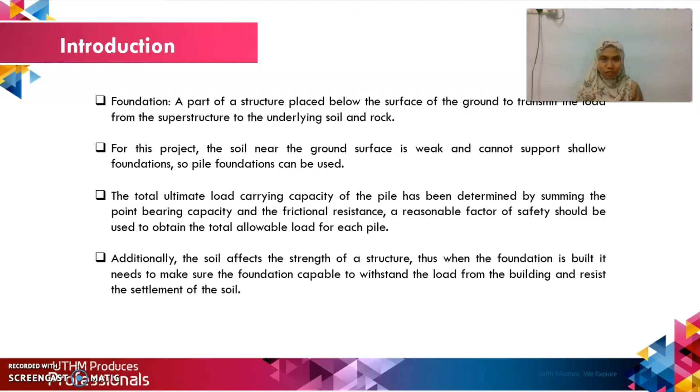In addition, the soil is influenced by the structural strength. So, you need to ensure the foundation is capable to withstand the load from the building and resist the settlement of the soil. Okay, next, let me introduce the company background.

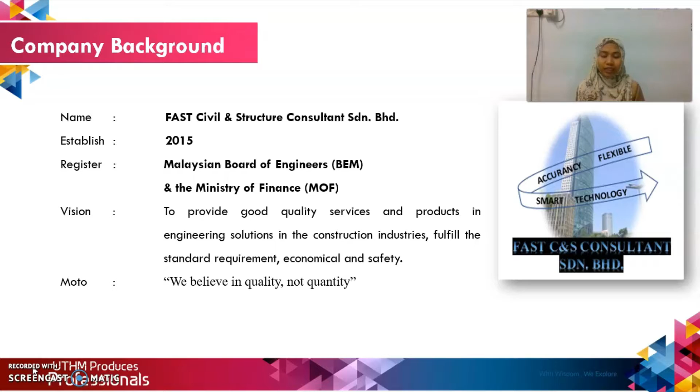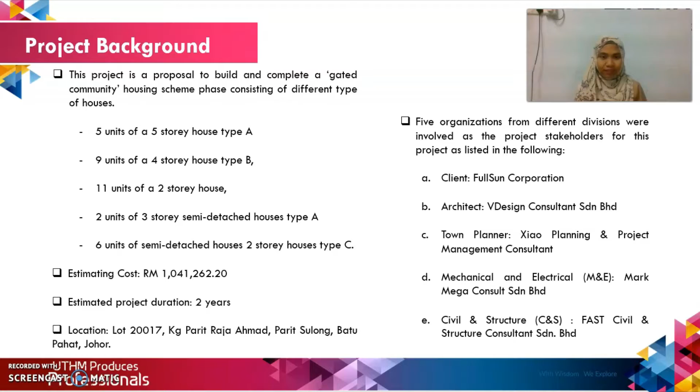This project is a proposal to complete and build a gated community with 5 different types of houses located at 20017 Kampung Parit Raja Ahmad, Parit Sulong, Batu Pahat, Johor, with a 2 year project duration and estimated cost of more than 1 million ringgit Malaysia, and 5 different types of organization involved: client, architect, town planner, mechanical and electrical, civil and structure.

The reasons for choosing the project location: first, the building is constructed on the same level of land, avoiding landslides. Then, the work technique used in every stage of development must be expected to impede the survey work, such as handling the crane, access road and the location of material storage.

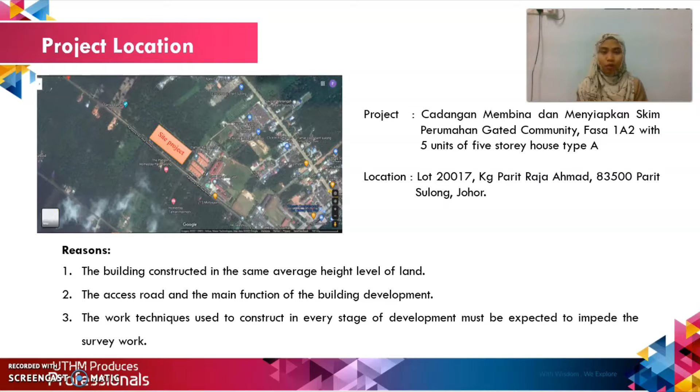For this project, 1 unit of 5-story bungalow type A will be designed. The FAST Civil and Structure Consultant Sdn Bhd company is appointed for the structure and civil project. The project involves analyzing the load design from every column of the building, the foundation and settlement checking. The design is required to provide a safe and economic foundation according to the Meyerhof method and correlation with standard penetration test results.

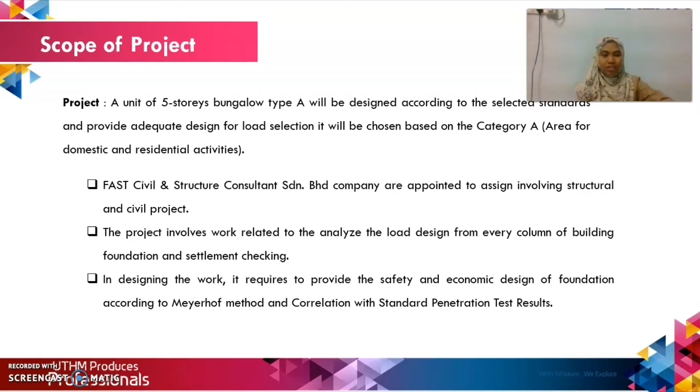Therefore, the objectives of this study are to analyze the design of the foundation and identify the settlement checking using the engineering design format. That's all for me. Thank you.

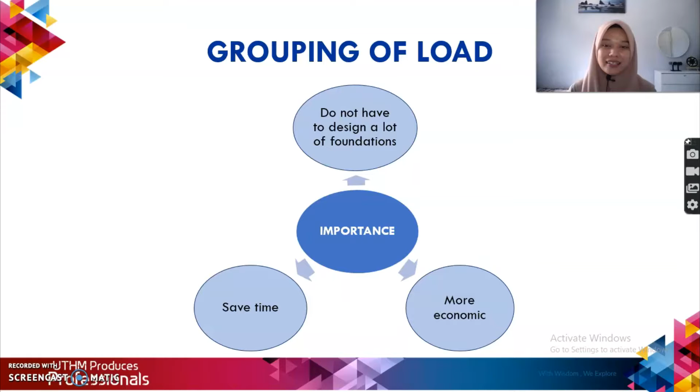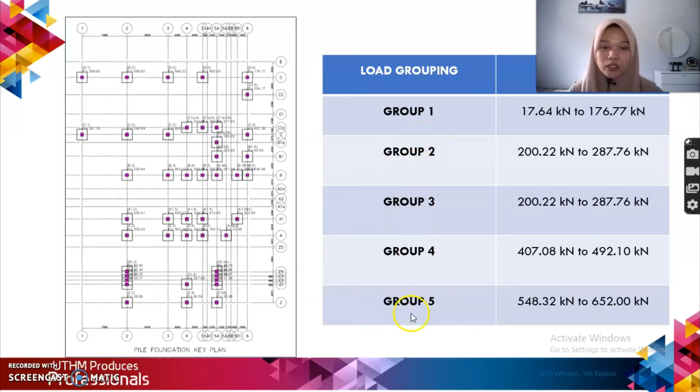Hello, my name is Fatin Fahawani. Now I will proceed with grouping of load. The load under each column will be classified into 5 different groups according to its load range. The importance of grouping of load is we do not have to design a lot of foundations, which saves time and reduces cost. According to this pile location, we classify the load into 5 groups, from group 1 until group 5, and this is the respective load for each group.

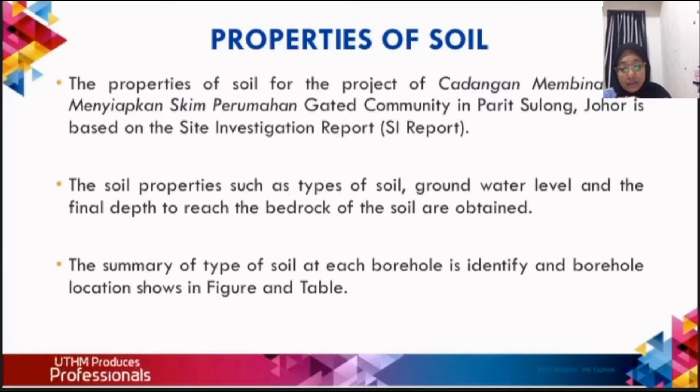Next, I will explain the properties of the soil. The properties of the soil for the project cadangan membina dan menyiapkan skim perumahan gated community in Parit Sulong, Johor are based on the site investigation report. Soil properties such as type of soil, groundwater level and the final depth to reach the bedrock are obtained. The summary of the soil type at each borehole and the borehole locations are shown in the figure and table. This shows the 4 different locations to obtain the borehole data.

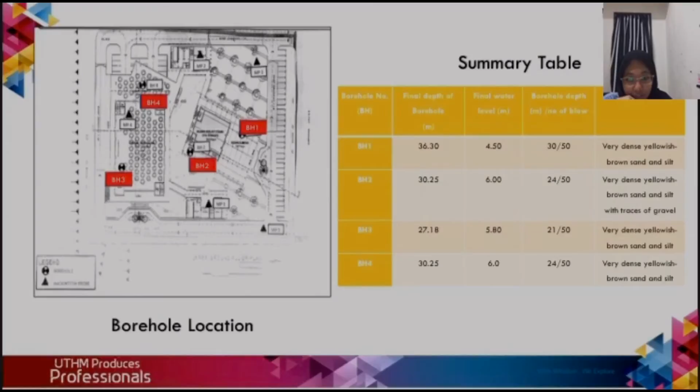Next, the summary table of borehole data. The final depth of BH1 is the highest, which is 36.30 meters compared to the other boreholes. Next, the final water level for borehole 2 and borehole 4, which is 6 meters, is highest compared to the others, and borehole 1 has the highest depth, 30 meters, to reach the number of blows. The soil type is very dense yellowish brown sand and silt. However, for borehole 2, traces of gravel can be seen.

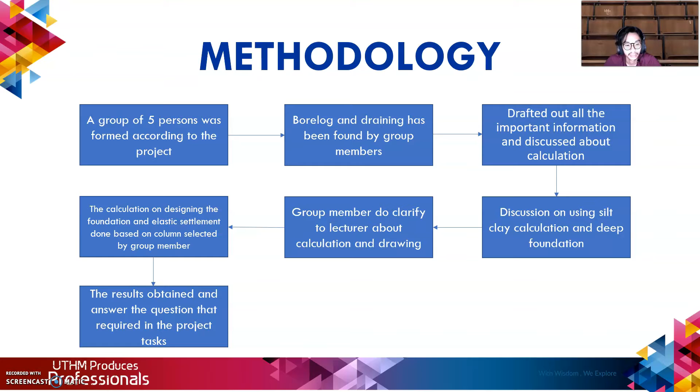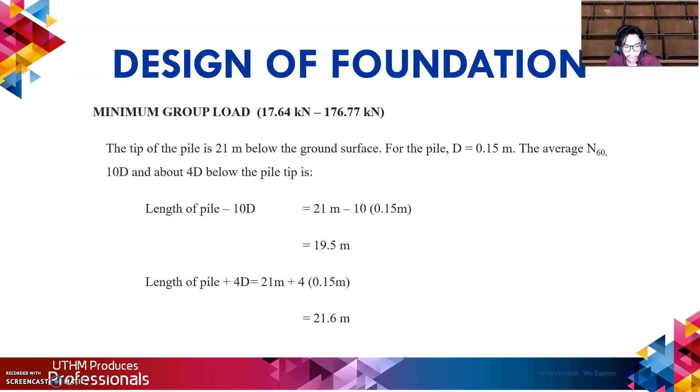For the design of foundation, we go to the minimum group load, which is 17.64 kN to 176.77 kN. The tip of the pile is 21 meters below the ground surface, the D of the pile is 0.15, and the average N60 we need to check first. For the length of pile 10D, we subtract it and get 19.5, and for the length of pile 4D, we add it and get 21.6 meters.

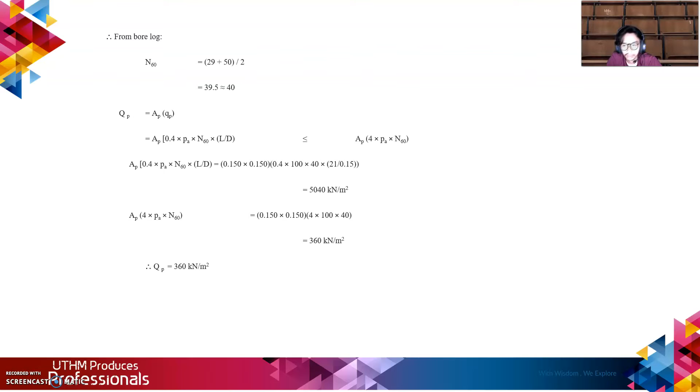So from the bore log, N60 is equal to 40, and next for the QP, after using the formula we calculate it, we got 5040 kN per meter square, and for the AP we got 360 kN over meter square.

For the QS, the formula is P times L times FAV. For the FAV, after calculating using the formula, we got 80 kN over meter square, and for the QS we got 1008 kN. For the Q all calculation, using the formula QP plus QS over the safety factor, which is 3, we got 456 kN. So the Q all is bigger than the Q column, which is 456 bigger than 176.77 kN.

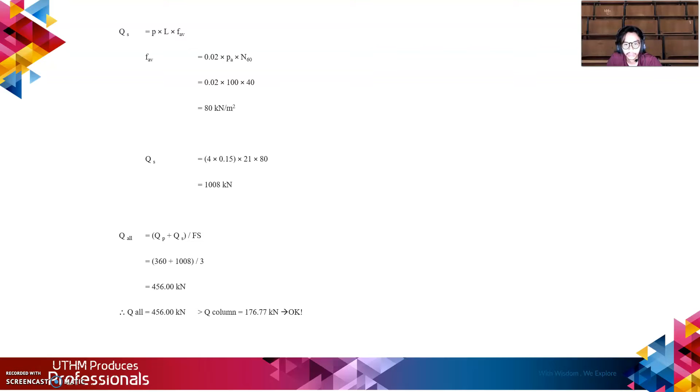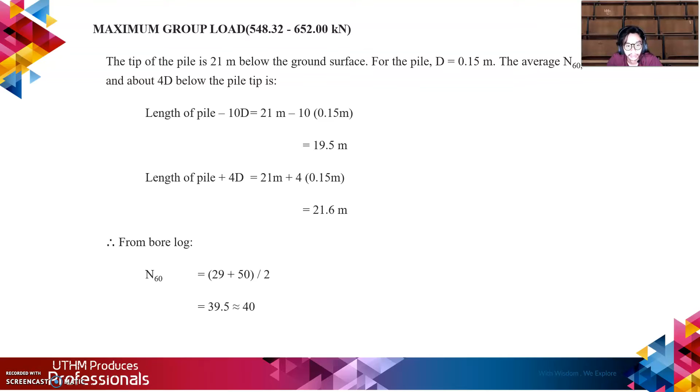So we can use the design. Next, for the maximum group load, the tip of the pile is 21 meters below the ground surface. For the pile D, which is 0.15, and the average, we use the same as earlier, which is the minimum group load. The length of pile is the same, and the bore log is the same. So for this maximum group load, we need to use the Meyerhof method and the Briaud method.

For the QS of Meyerhof, we need to calculate FAVs first, which we got 80 kN over meter square, and the QS is 1008 kN. For the Briaud QS, FAV is equal to 6.53 kN over meter square, and the QS is 82.28 kN. So the ultimate load of the pile, QU, equals QP plus QS.

We need to calculate the QP first. After calculating using the formula, we got 1890 kN over meter square. For the AP, after calculating, we still got the same 360 kN over meter square. So the QU of the Meyerhof method is 2898 kN, and for the Briaud method we got 1972.28 kN.

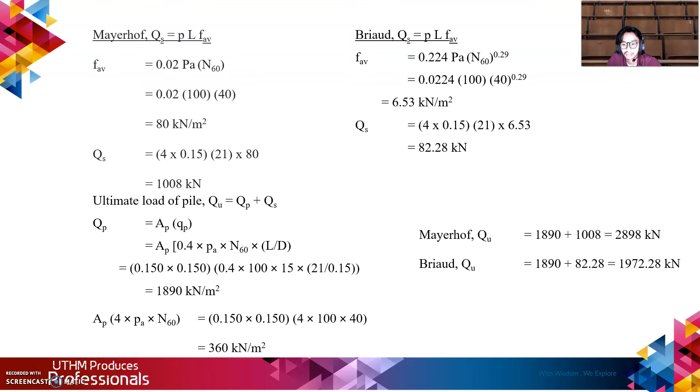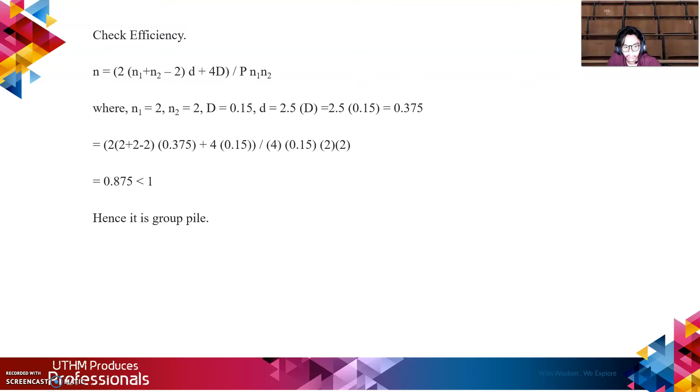So we need to check the efficiency, which is N. We need to assume N1 and N2. After we calculate it, we got 0.875, which is below 1. So if it is below 1, hence it is a group pile.

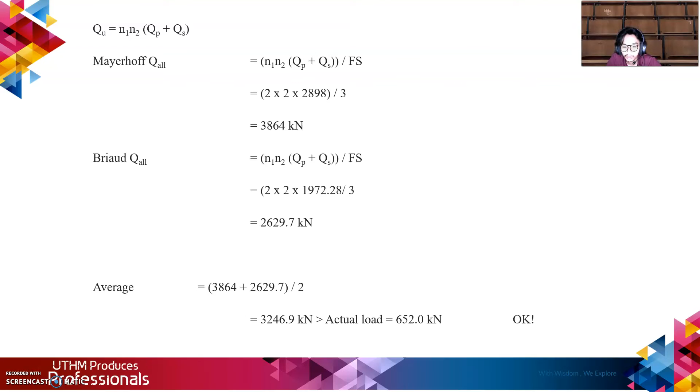So for the QU we need to use that formula. Meyerhof Q all equals 3864 kN, and for the Briaud method, QL is 2629.7 kN. As for the average, we sum the QL and divide by 2, which gives us 3246.9 kN, which is bigger than the actual load, 652 kN, which is good.

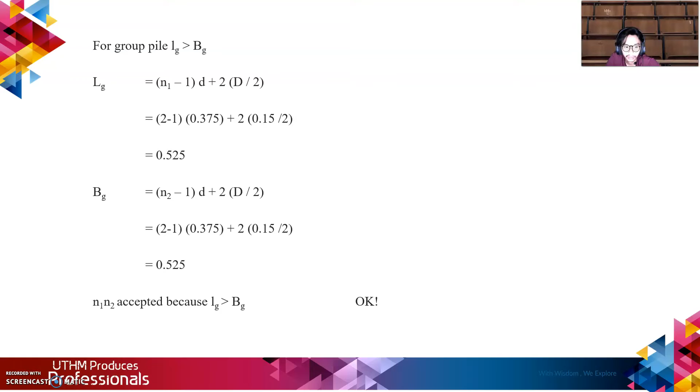For the group pile, we need LG to be bigger than BG. After calculating it, we got the same 0.525. So N1 and N2 are accepted.

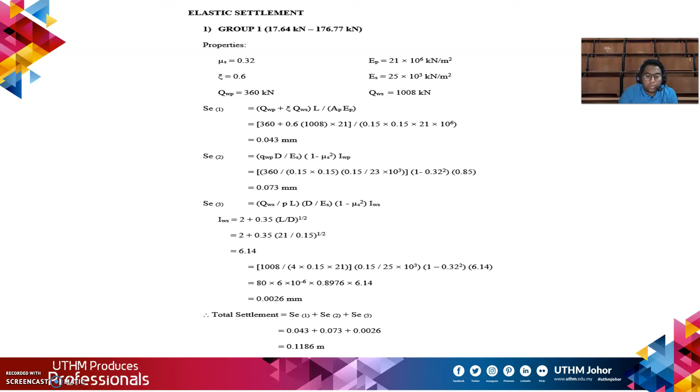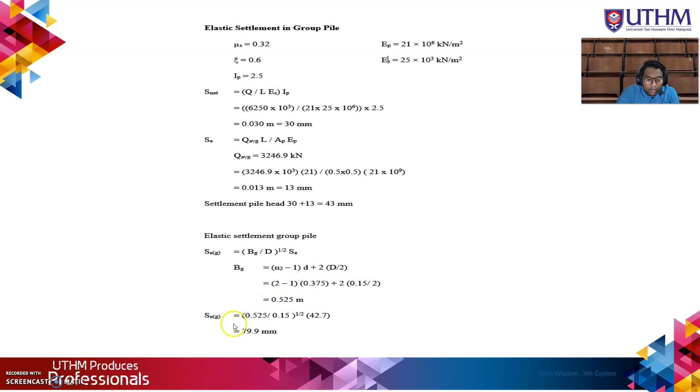For the maximum load elastic settlement calculation, the SNET we get is 0.030 meter, which is 30 millimeters, and the SE we get from the Q average, which is 3246.9 kilonewton, is 0.013 meter, equal to 13 millimeters. So the settlement pile head we get is 43 millimeters. For the elastic settlement group pile, the settlement group pile we get is 79.9 millimeters.

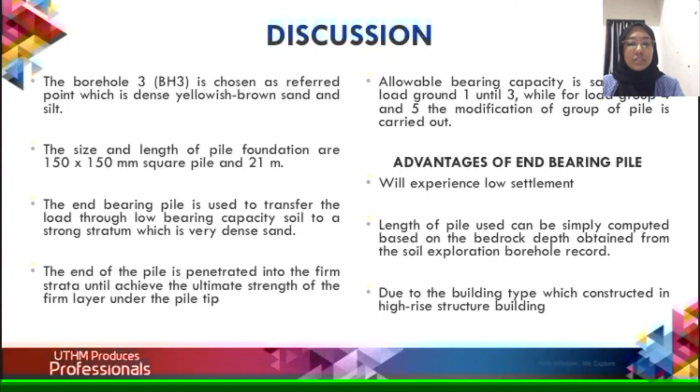Next, allowable bearing capacity is satisfied for load groups 1 until 3, while for load groups 4 and 5, modification for group of pile is carried out. The advantages of the end bearing pile: it will experience low settlement. Length of the pile used can be simply computed based on the bedrock depth obtained from the soil exploration borehole record, and lastly, due to the building type which is constructed in high-rise structure building.

So for the conclusion of this project, we can divide it into two different parts: design consideration and soil improvement. For the design consideration, from the bore log we get that this location contains sandy soil type, so the proper method for construction of foundation needs to be taken into account. Other than that, the location of the water table can also be obtained from the bore log. So the foundation design must consider the soil type and the location of the water table to make sure it can resist failure, such as sliding, overturning, and bearing capacity failure.

For the second part, soil improvement: since this location consists of sandy soil type, two methods can be proposed to improve the compaction and drainage of the soil, which are sand compaction piles and vertical sand drains.